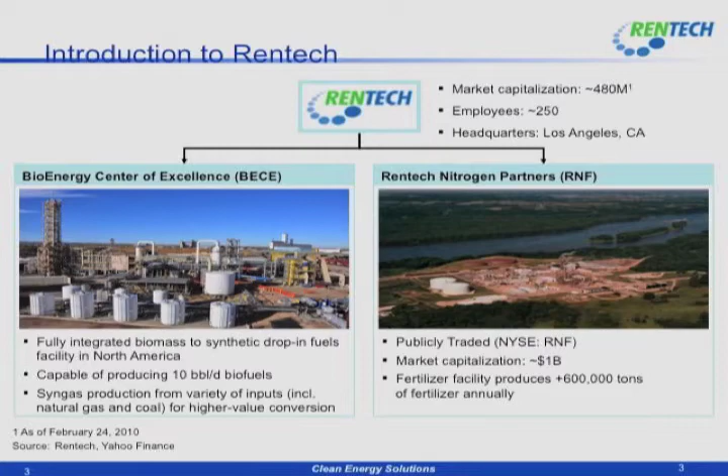In terms of our technologies, we really own three. I'm going to start over here. This is the Fischer-Tropsch process, where we take syngas from pretty much any source, clean it, adjust it to the right ratio, put it through our reactor, and that is the Fischer-Tropsch reactor at the Bioenergy Center of Excellence. It's 110 feet tall. It's about 16, 18 inches in diameter. And it produces around 10 barrels a day of Fischer-Tropsch liquids. 7 of it would be either drop-in diesel or drop-in jet fuel. And the balance is naphtha, which is a lower BTU product.

A couple years ago, we bought a technology known as SilvaGas, biomass gasifier. It actually had a 400 ton per day unit in Burlington, Vermont, connected to their power station there, which was wood burning. It was part of also a DOE grant at that time. That was before we owned them, and demonstrated the technology. It's a dual circulating fluidized bed. I'll have a little bit different picture of it here in a moment. But it was really done with wood. They did not use any of the other energy crops at that point.

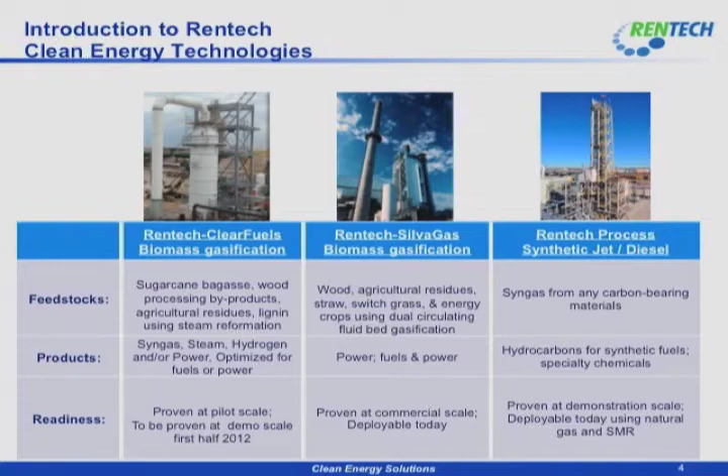We've proven this one at pilot scale, the ClearFuels. It was actually done in Aberdeen, Mississippi, and we are now in the process of bringing it up in Commerce City to take it to the demo scale there. This has been proven at commercial scale, and we have proven at demonstration scale our synthetic Fischer-Tropsch process.

They are drop-in fuels. This is our CEO, Hunt Ramsbottom. We actually participated with Green Car Congress magazine and Audi, and drove a car down the coast of California a number of months ago. We ended up buying the car, and we've driven it from California to the DC Auto Show and back, all on fuel produced there at the site in Commerce City.

That's about the only thing it used, and it is the only thing that we've used. It was quite a challenge chasing that car across the country with 5-gallon cans of diesel, but we managed to do it. And it's got about 60,000 miles on it at the moment, and running great.

This is the United plane. I believe that's Bob Sturtz, who is the chief fuel buyer for United. We took jet fuel from the site. Jet fuel is only certified up to a 50-50 blend. We blended it with normal commercial fuel, and they flew it out over Kansas and back with our CEO and chairman of the board on it.

Our chief technology officer got to go, just to make sure. All reports and the data that came from it showed it was an excellent performance. In fact, when they landed it, there was still some of the fuel left in the tank, they refueled and took off on a commercial flight with the same plane after they were done.

So let's focus a little bit on the Bioenergy Center of Excellence. As I mentioned, we produced our first fuel in August of 2008. We've done it under the name the Rentech Energy Technology Center, because what we're doing there is using a steam methane reformer to take natural gas and convert it to syngas. Now with the advent of the biomass gasifier and our focus on bioprocessing, we have formed at the site the Bioenergy Center of Excellence.

So again, two different names, but both the same location, and essentially the same group of people working in the area. It really is a site which we have designed to be highly flexible. We could bring in other technologies, and we are talking with other companies about partnerships where they may need our bioproduced hydrogen, they may want our bioproduced syngas, or they may want to take their process and upgrade it using our upgrading technology to different types of fuels.

We can also use wax, which is the intermediate produced in the Fischer-Tropsch. It's referred to as wax. It's a paraffinic material at room temperature. It smells like, tastes like, looks like wax. Any paraffin wax that you see, except it's a little bit harder. If you hear me use the term wax, that's what I'm talking about. Our fuels do meet the ASTM specs for diesel and the specs for jet fuel.

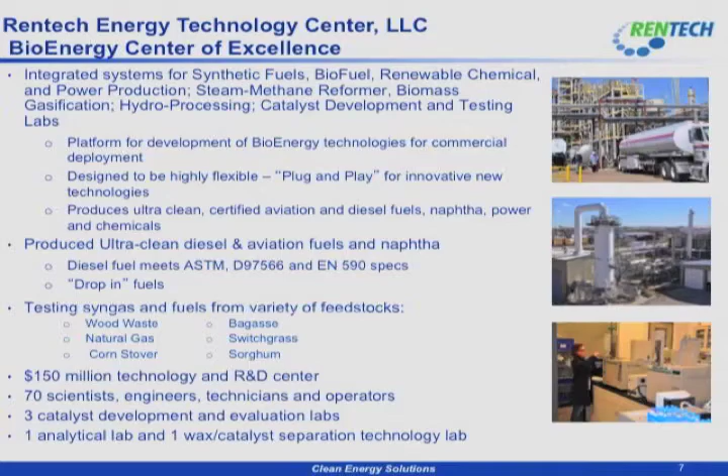And then we have another lab that allows us to look at this essentially liquid-solid separation, but do it at room temperature. We're using oils of densities and viscosities that match what the wax would be in the reactor. And we're able then to do things at room temperature in plexiglass-built equipment. And that's part of the laboratory as well.

So with the addition of the ClearFuels gasifier, and I'll show you the differences between that and the SilvaGas in a moment, we've created this Bioenergy Center of Excellence. We've used $23 million that was awarded to ClearFuels from the DOE, and we've added to it $13 million of investment from Rentech shareholders. It's going to allow a flexibility. We, as part of completing the DOE trial, will be using wood and sugarcane bagasse. Again, ClearFuels was founded in Hawaii and has its roots there, and that was one of the original proposals, to show that we could use the waste from the sugarcane mill to make diesel primarily.

And we have all of the necessary equipment also to take any syngas that's produced, separate out the carbon dioxide as well as any other impurities that might come from the particular syngas source or feedstock source. That'll be the one that we'll probably be putting more to the test in coming days. Natural gas is a breeze to clean up. Now as we begin to bring in the wood and the switchgrass and the bagasse, things of that nature, we'll have other components that we're going to need to get out of the system.

That is the shell of the reformer as it was being set into place just a few months ago. We actually broke ground in June of 2011. We did a mechanical completion in November of 2011, commissioned the equipment, and are now going through some of the growth pains that you go through as you try to bring up any good size process. But the good news is the core technology in here has been performing as expected. It's been some of the linking equipment that's been more of the issue.

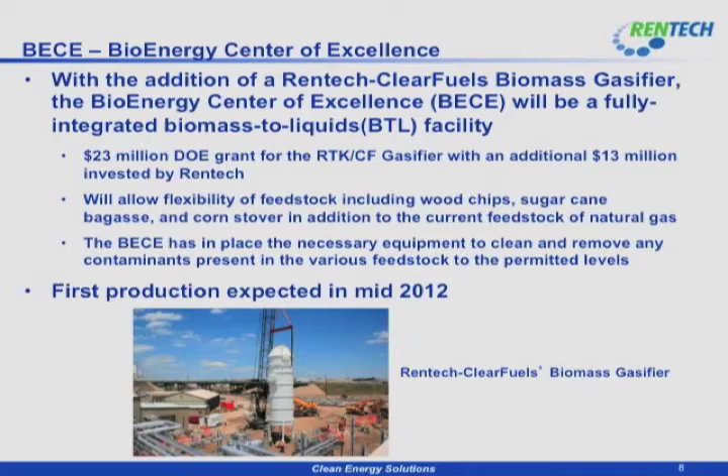What we do at the Bioenergy Center of Excellence is we spend a lot of our time trying to get through what is called the valley of death for many technologies, getting out of 6 into 7 from a technology readiness level. We believe we've gotten natural gas to fuels at a TRL of 7. Although we have not demonstrated it at this site, with the demonstration in Burlington, Vermont, we believe we can do biomass to power with a readiness level of 7. And we think we're around 6 and working towards 7 as we're bringing up the biomass gasifier.

We do work down in the earlier stages. I haven't listed it because it's not ready for prime time yet, but we do some of our own work in this area. We also are looking at companies that want to come in and maybe are in this area and want to move on up and can use, as I mentioned earlier, the syngas or the hydrogen or the upgrading capability. And as we develop those relationships, then we will bring those on board as well.

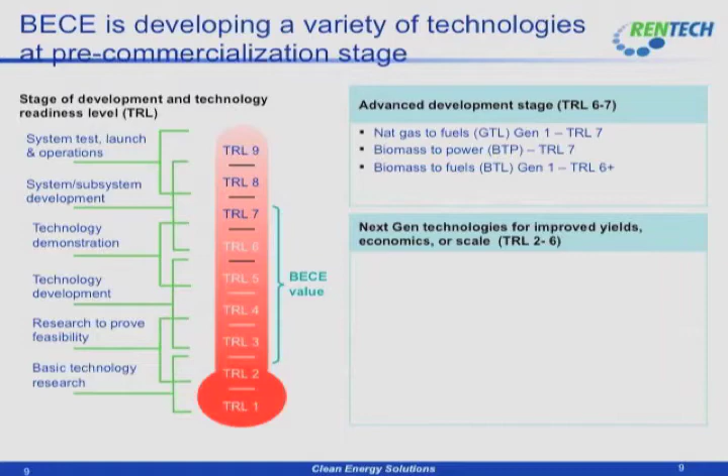These are the technologies. I will qualify: ag waste is really things like corn stover. We haven't gone into any of the types of liquid waste or things of that nature that some people might be looking at. We certainly can do natural gas. At one point, we were looking at putting in a gasifier that could do coal and petcoke, but with the change in emphasis away from coal, as well as with some technical problems that we were encountering, we walked away from that and went to the natural gas instead.

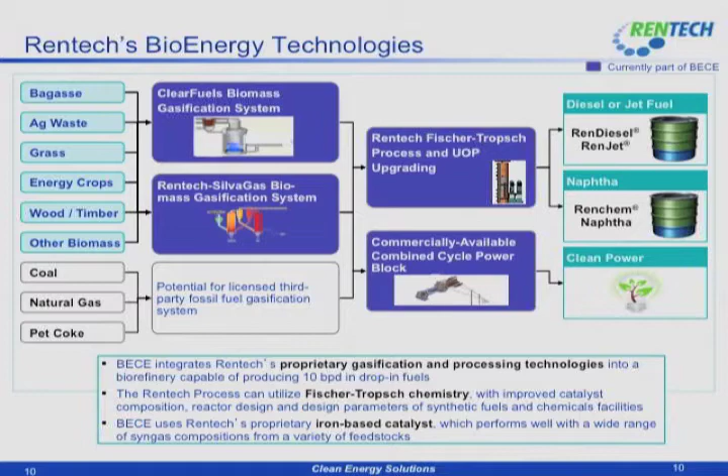So we integrate the gasification and processing technologies. We utilize the Fischer-Tropsch chemistry, which is quite old chemistry, and we're developing the iron-based catalyst.

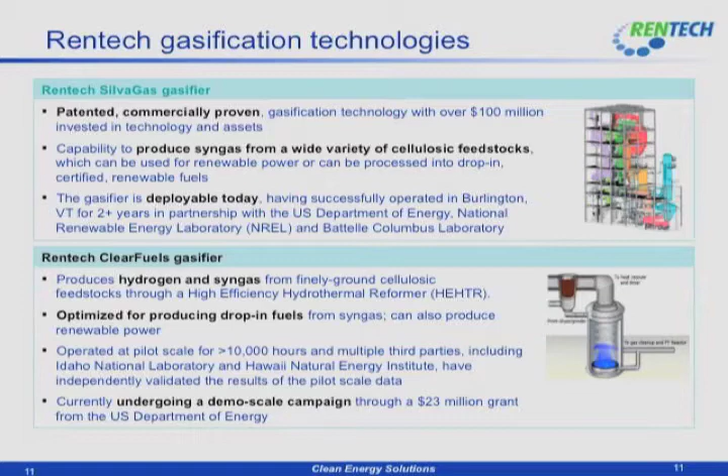But really the two different technologies, one is a dual fluidized bed, and this is a more traditional reforming of biomass. It's non-catalytic. The actual manufacturer of that reactor that I showed setting in place is the same company that made the steam methane reformer that we have on site. And so we've got a lot of experience and now trying to bring it up.

Our Fischer-Tropsch technology is three-phase, bubble column, syngas in, catalyst inside. You form the paraffin material that becomes the liquid phase. We bring it out over top and we take the catalyst out, or we take a clarified wax off, put the rest of it back in, and we have that type of circulating reactor as we produce more and more of the paraffins.

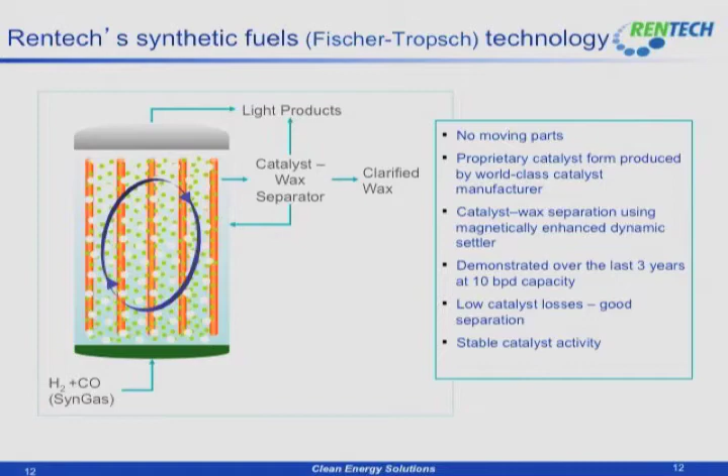We go from there into an upgrading based on UOP, which is a Honeywell company. It's kind of the premier hydroprocessing technology company in the US. We've got hydrocracking for the more waxy products, hydrotreating for the lighter products, and we use that equipment then to produce the diesel and jet fuel.

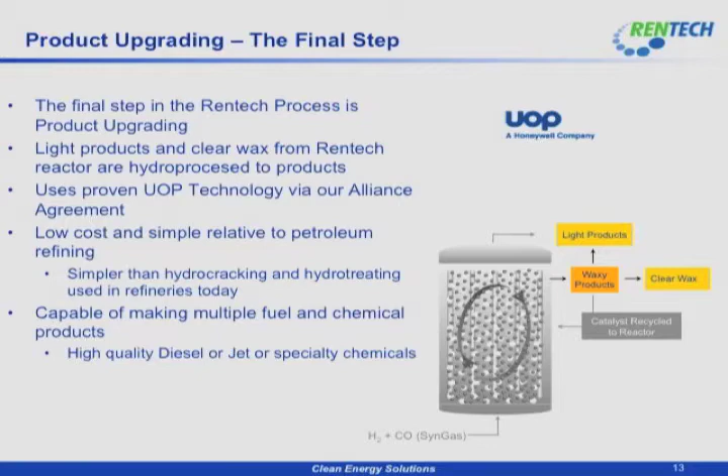Won't go through this. This was an eye test, really, but it kind of shows you the complexity as we flow through the biomass. Here's the feed handling, here's the gasifier, here's the initial gas stream cleanup as we're going through cyclones and a Venturi scrubber. We come through different stages of gas stream cleanup using different contacting wash techniques, and then we come into the Fischer-Tropsch and product upgrading area. Many different units that are linked together in order to get down in here where we are actually producing the jet and diesel.

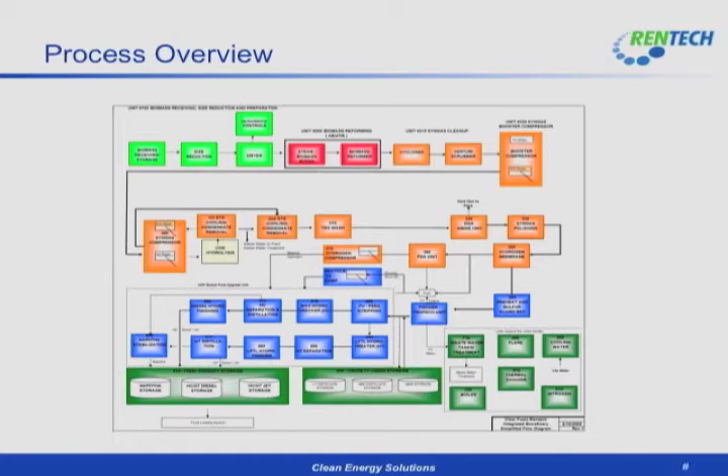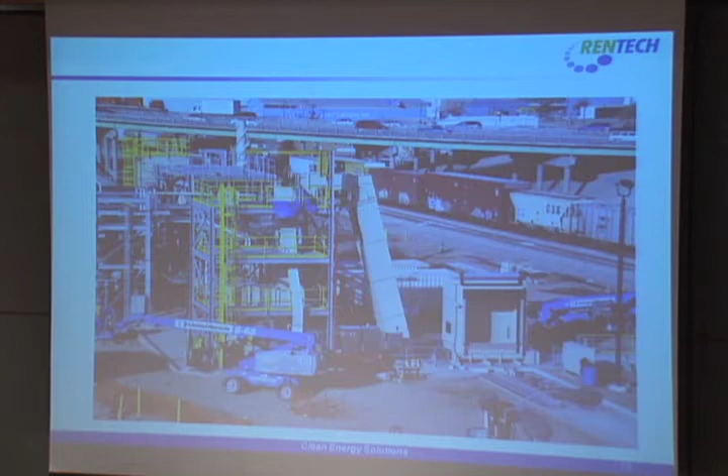I've pretty much covered all of that. Let me give you just a quick photo tour. This is the entrance to the site. That's our reactor. The rocket-looking thing is our flare. This is the steam methane reformer. That is the biomass reformer, and this is all the feed handling equipment that goes along with that biomass reformer. This actually is where we dock the truck. The next photo will show the truck. We use walking bed trucks because we are a small operation. Come in with the feed, dock here.

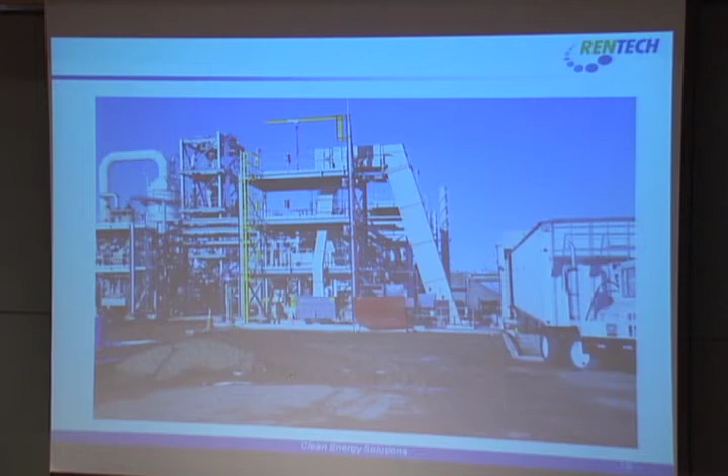There's the truck docked. Goes down underground, comes up in a moving belt conveyor, goes through a weigh belt, some magnetic detection to get any metal that might be in there out, and comes through a conventional knife rotary grinder, a Jordan grinder at this point. Comes out of there, goes through a vibrating belt dryer, under the road, up to the top of this structure, where it is a 2-hour capacity feed hopper, comes through a rotary valve to control the feed, goes through a steam mixing vessel to integrate the superheated steam and the biomass, and up and into this reactor, which has 2 helical coils inside. And that's where the reaction takes place to create the syngas.

Out of there, we go through to waste heat recovery, as well as Venturi to do some scrubbing, and then we actually link up with the rest of our process. There's a syngas compressor right now that takes the syngas from the steam methane reformer. When the biomass syngas is flowing, this will be shut off, and we will connect the biomass and come through the Fischer-Tropsch, the upgrading area, after we go through the gas stream cleanup.

We'll use this as status, challenges, questions. We are in the process of starting up. Most of the problems and issues we've faced have been in material handling. We discovered we're a chemical process organization used to handling liquids and gases. We had a little more difficulty dealing with some of the material handling, both the conveyance as well as feeding out of that feed hopper. We've resolved that problem, and so we got through the syngas reformer, and then discovered that we had some issues with our gas stream, with the heat removal system.